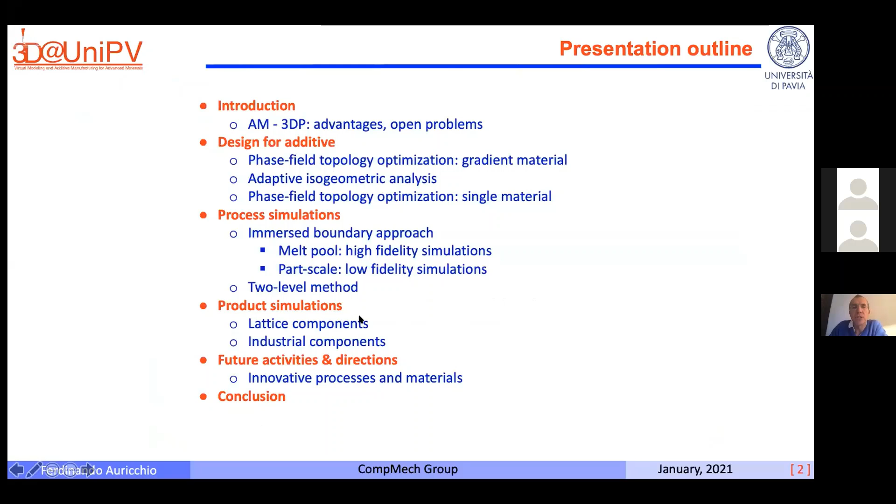Since the school is on additive manufacturing, I don't think I really need to go into it because you are experts by now, and I will really focus on different areas of simulations and possible activities you can do with simulations.

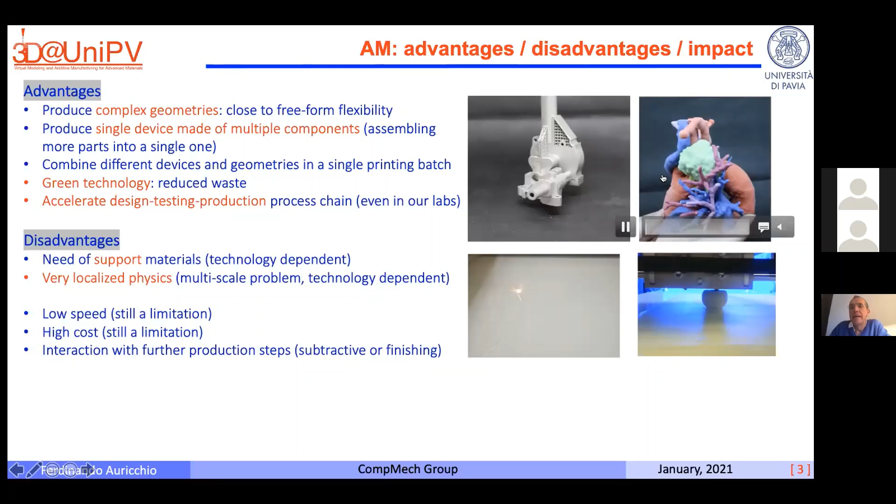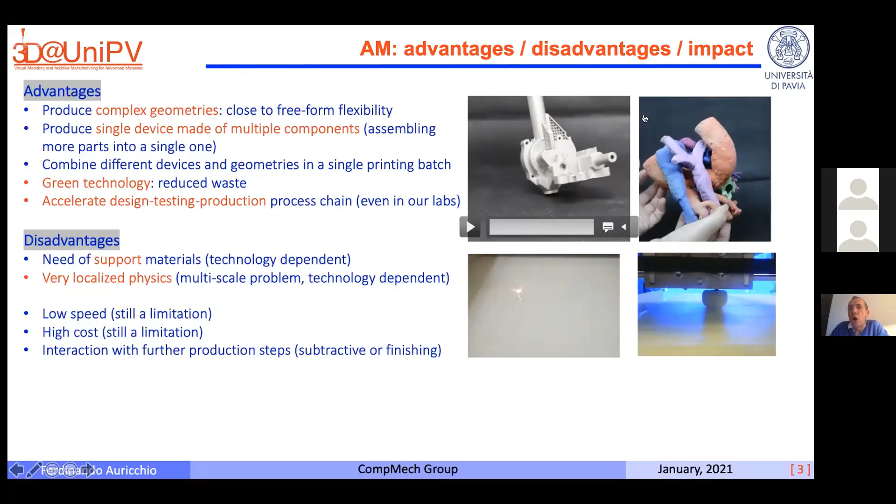So, the point I want to make is basically twofold. On one end, additive manufacturing is a wonderful technology because you can easily produce complex geometries, and in many cases you can also put multiple components in a single device. So it's very easy when you deal with additive manufacturing that you end up with objects which have a really complex geometry.

On the other hand, that's the good news. The bad news is that when you talk about additive manufacturing, you're always talking about production processes which are very localized, with a very high gradient. And in this respect, computer simulations are extremely important.

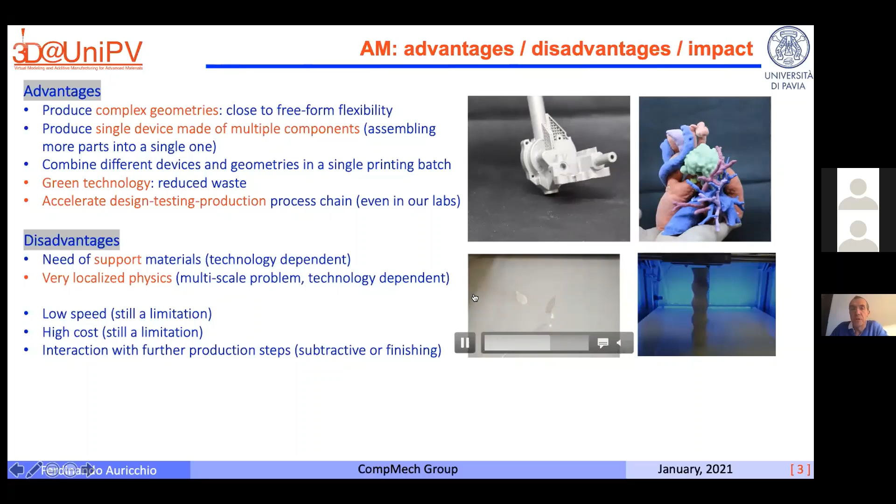So the idea is to address different opportunities, and I will start talking about design for additive. Design for additive presents several challenges, and one of the reasons is that basically additive manufacturing is really opening your brain, and you can dream any sort of geometrical complexity.

So you're very close to freeform components, and this means that if you really want to take advantage of this freeform possibility, you really need to optimize your geometry. And this brings our attention to topology and shape optimization as extremely important tools for the design of these components.

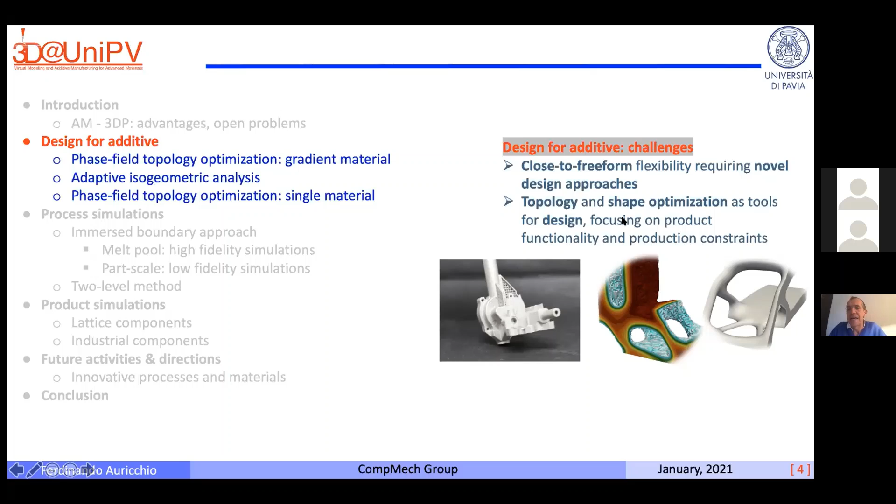Topology optimization is something you already saw in the course. The idea of topology optimization is basically that you have a domain in which you want to distribute a certain amount of material, and you want to optimize the distribution of this material in order, for example, to minimize the structural compliance. So you have your domain omega, some boundary conditions, some loading conditions, and you want to distribute some material and minimize some functional.

Our approach is to try to minimize, for example, the compliance using the phase field method. This is a method which does not require any filter like other methods, and it's very nice because you can get some mathematical proofs regarding the convergence of the method, and these features also transfer into some numerical aspects.

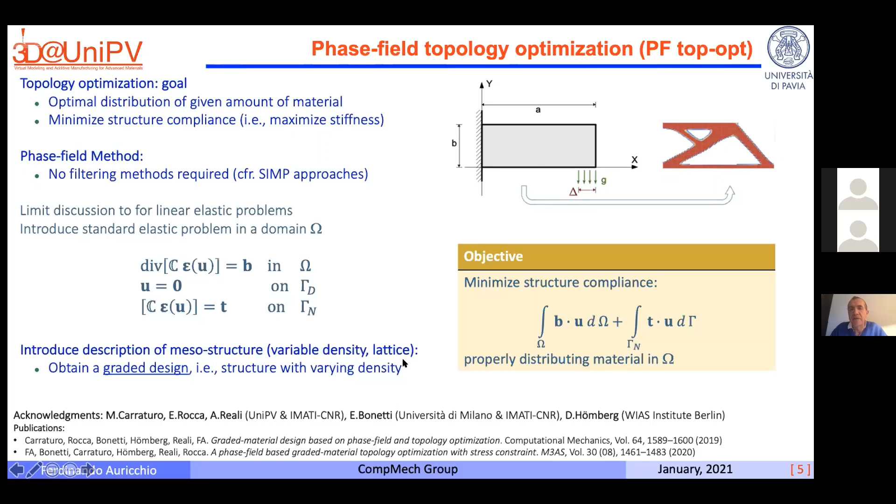The first phase field variable is phi, and basically this phase field describes material presence. Then we have another phase field variable, chi, which describes material feature.

So with this second variable, we want to give the opportunity for our structure not to show only one material, but to have inside our domain the possibility of going from material B to material A. This is really related to the fact that with additive manufacturing, you can easily produce microstructures or lattice structures. So the idea is that you don't only want to understand where you don't need to put the material—that's the phi variable—but you also want to describe which material you want to place and where.

Okay, so using a phase field approach, we introduce a functional where you have your standard compliance, which are basically the two integrals reported here, and then we also have a very classical measure of the perimeter, which is associated with your first variable. However, since we have a second variable, we also want to penalize the gradient of the second scalar field. So basically, we don't want to have the possibility of a structure where you jump from material A to material B too many times.

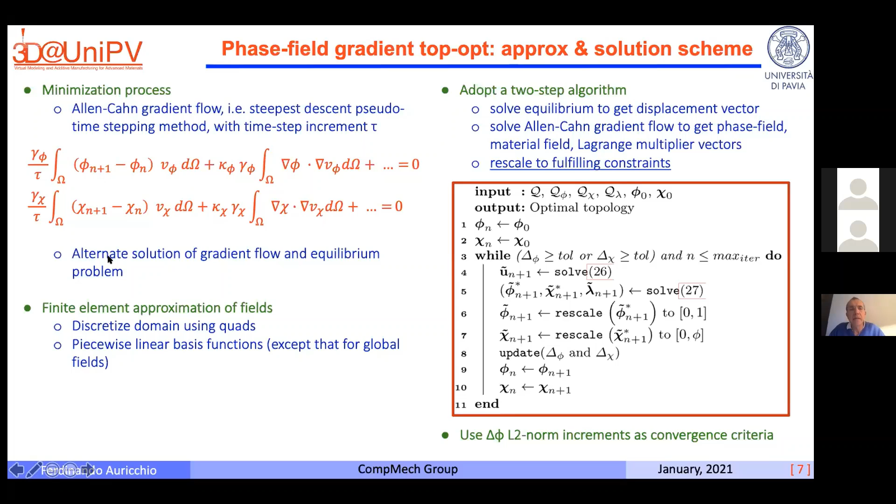Clearly, you can then discretize using finite elements, and the very nice thing is basically the examples you can produce. For example, this is a very standard problem: a cantilever beam, which is clamped on this side. You have some distributed load here, no body load. And if you make your numerical tool run, at the end of the story, you can get this type of solution.

So the structure that we obtain through these topology optimization schemes is already a structure with a gradient, which you can easily produce with additive manufacturing.

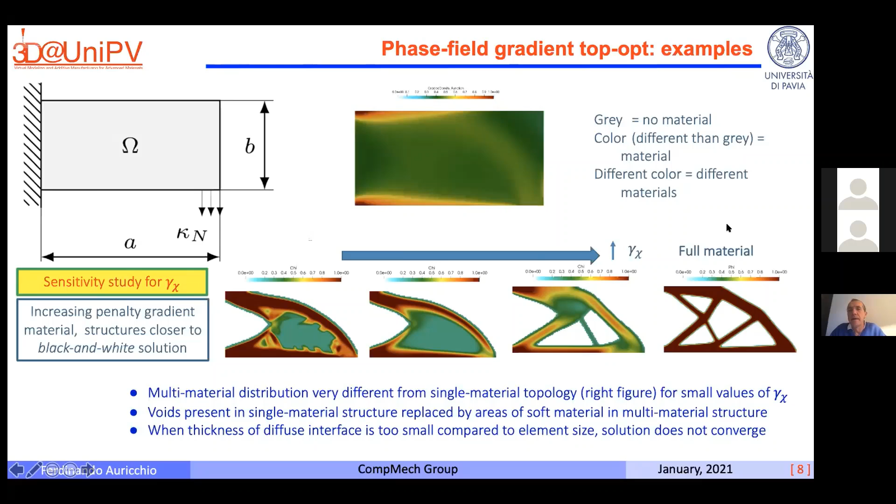You can clearly do parametric studies, and here I'm reporting some numerical results. The basic concept is that by changing the constraint on this second field, you can obtain a structure which shows different compliance, but at the same time also different weights. And you can go from a single material structure to a structure which really exposes this gradient material inside it. So you really have another extra degree of freedom in your design, which we believe is quite useful.

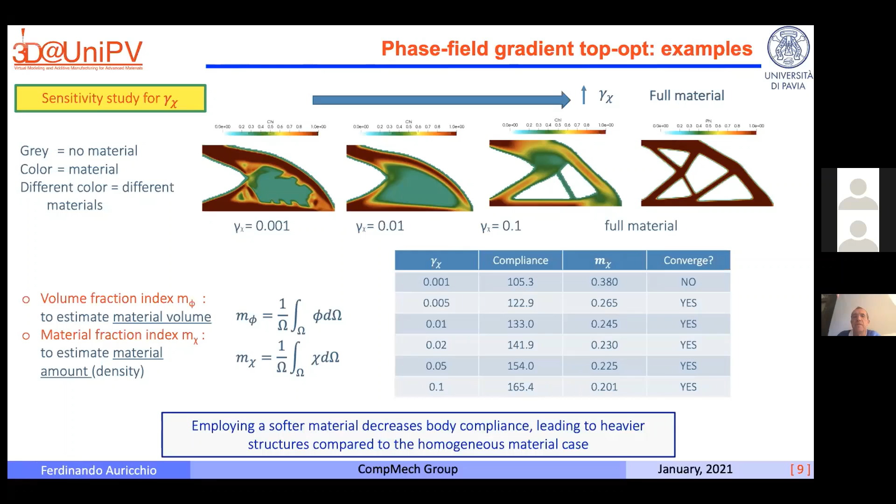Okay, you can do exactly the same thing, for example, for other types of problems. So I was showing the first result for a cantilever beam. Here you can see a very standard comparison test, which is this type of simply supported beam with a concentrated load in the middle. And if you run your optimization, you can see with the black color the region where you have material or you don't have material, and with the graded color here, the region with different types of materials.

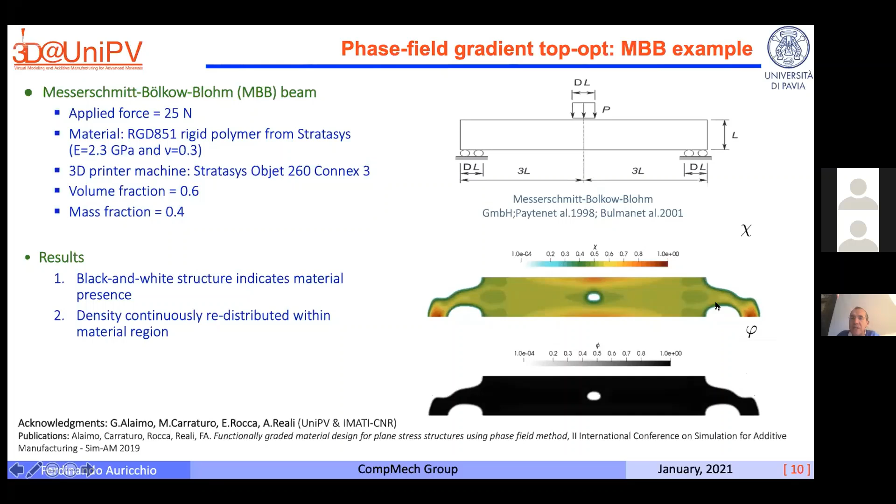The very nice thing with additive manufacturing is that you can also produce your component and you can do experimental tests. So once we run our numerics, we also developed some computational steps in order to end up with a component, which you can see here, where you can a little bit see the internal structure. You can see that in certain regions you don't have material, but in other regions we have a graded structure. And the very nice thing is that we did experiments, and here on the right you can see the structure which is uniform as a material.

So we distributed a certain amount of material uniformly, and on the left we see the same geometry, but where we distributed the same amount of material in a graded way. Here are the mechanical responses.

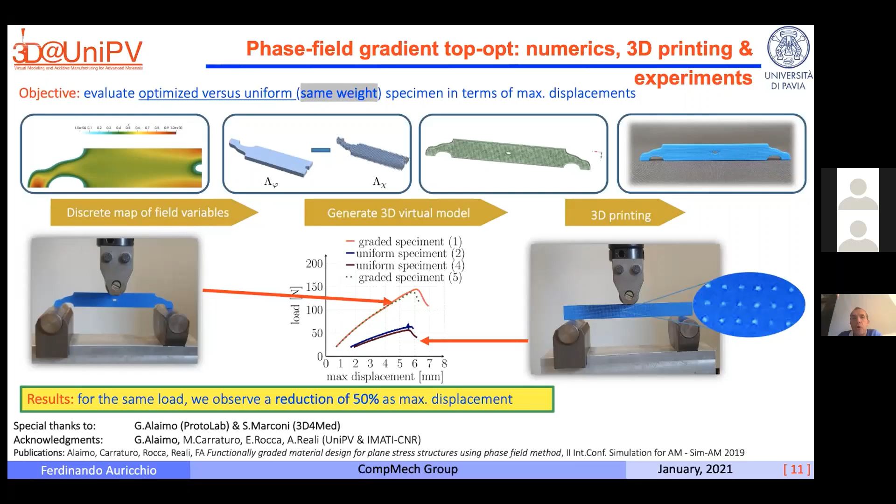And clearly you can see that for the same amount of material, for the same amount of load, the structure which has been properly designed behaves much better, is much stiffer than the other structure. So distributing your material in a smart way inside your domain can really have an effect on the performance of your component or device.

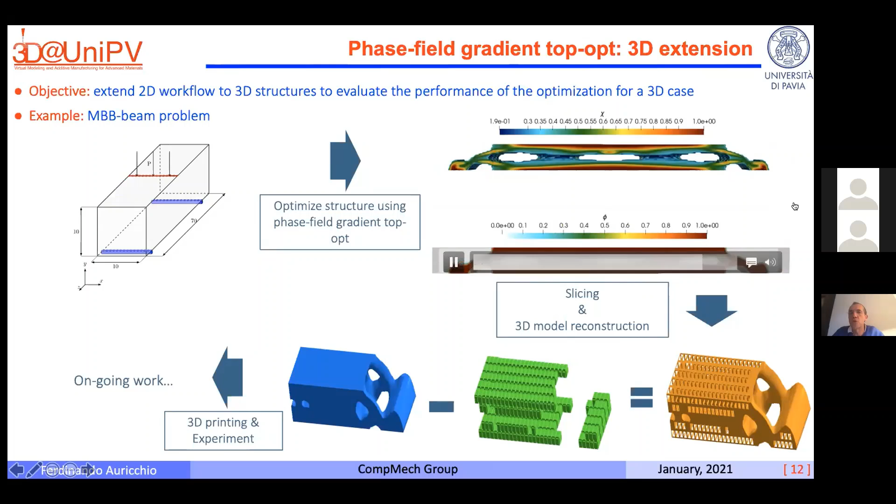The first two examples I showed you are two-dimensional, but clearly you can run the same algorithm in 3D, and here you can see some initial results in 3D. We are getting new results also in these days, so basically the tools work properly in 3D as well.

One of the problems you encounter when studying topology optimization, with the freedom you have with additive manufacturing, is that you don't know exactly where the region is where you need to put the material. So the idea is, if this is the domain where you want to distribute your material, to start with a very uniform numerical grid, but also to develop adaptivity schemes to obtain refinement and capture the local structures.

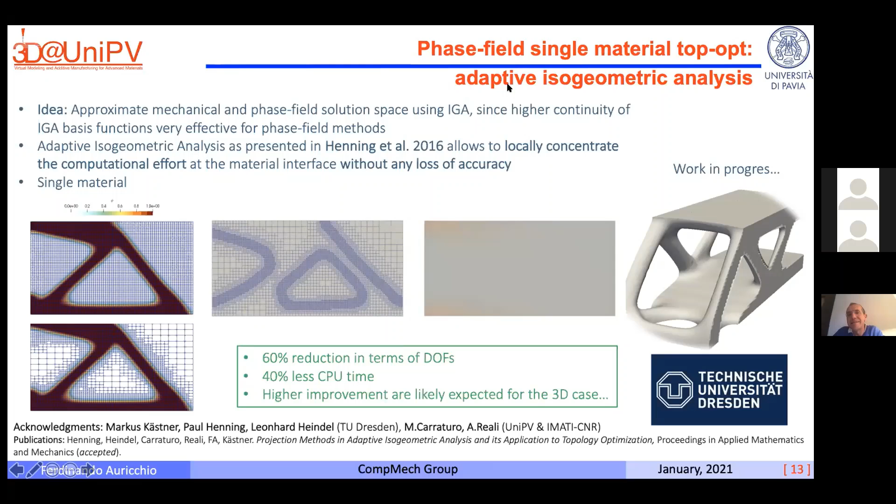Since you don't know where you're going to have material and where not, the idea is that either you have a very fine mesh from the beginning, or you start with a crude mesh but then need local adaptivity. Here you can see some very interesting results where we combine adaptivity and isogeometric approximation schemes.

On topology optimization, we are also looking at other aspects, and here we are proposing several advancements. One thing is that, referring to the previous formulation, now we look at single material instead of graded material structures, taking a step back, and we consider the very standard volume constraint formulation.

The nice thing is that we try to include in our functional not only the compliance, which you saw before, but also a bunch of different terms able to enforce equilibrium directly from a functional point of view. In the previous approach, I was minimizing compliance while controlling the field variables, and then imposing equilibrium separately, but not really enforcing the two together. Now, with this functional, we enforce everything together.

So we enforce minimization of the compliance, but also other constraints, in particular equilibrium, adopting something like an Uzawa approach, and then we also add the volume constraint. The beauty of this approach is that since everything is one functional, we can forget the multiple-step algorithm I showed before, where in one step we enforced equilibrium and in another we updated the phase field variables. With this functional, you can easily explore monolithic solution schemes, which possibly behave better. This formulation is very interesting because you don't only enforce volume constraint, but enforce minimization of compliance and equilibrium in just one box.

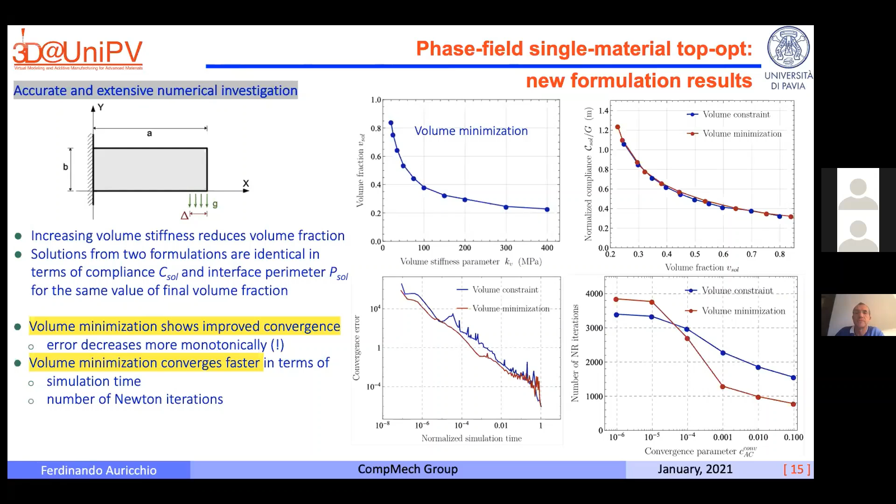This closes the first message, designed for additive manufacturing, which is basically about finding the best way to distribute your material in the domain.

Now I will move to the second area, which is slightly different: process simulation. Additive manufacturing, as I mentioned at the beginning, not only gives you a lot of freedom, so you need topology optimization, but it also gives you a lot of problems, because it's a very localized, non-linear phenomenon that you use to build your component.

So producing objects with additive manufacturing is sometimes not as easy from a technological point of view as with standard technologies. So you really need to do computer simulation and support your construction process with simulation.

What are the challenges when you want to do process simulations? There are many different challenges.

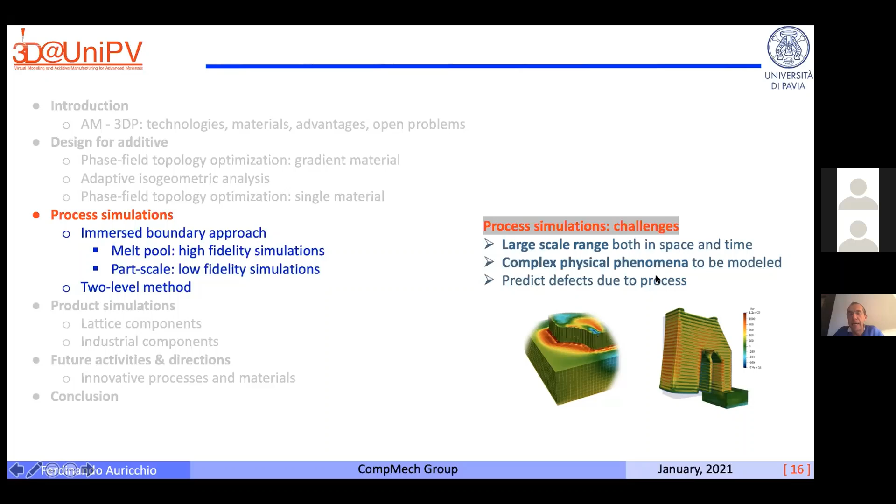One is the large scale range, because the process is local, it's in a very, very small range, but you want to construct components which are very large. So you want to describe very different scales at the same time. And on the other hand, you want to describe very complex physical phenomena. So it's really computationally challenging.

The classical approach is to use a very iterative loop, which is the standard design process. So basically, classically, you draw your component, you mesh it, and then you do the simulation. And if something isn't really working, you go back. This process is really iterative and really time consuming.

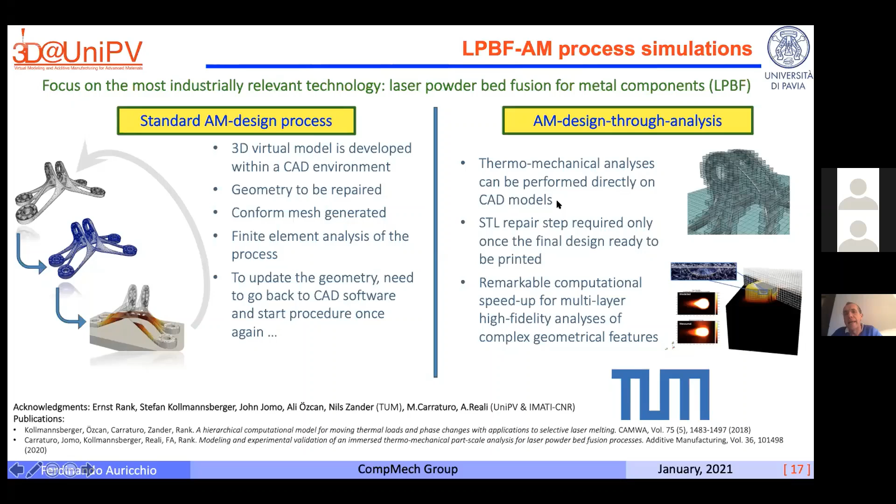Our idea is to be much faster, so not making this iterative process so rich in terms of steps. The basic idea is to try to use directly your CAD model to perform analysis. So we don't want to actually mesh the geometry, but we want to use the CAD model directly to do the analysis. The way we do this is using immersed methods.

In the following, I'm going to talk about two different immersed technologies. Conceptually, the immersed technology is very simple. If you want to study a component with this geometry, you simply immerse your physical domain in a much larger domain, and you mesh that much larger domain.

So your mesh is not, as usually said, a fitted mesh. If this is the physical component, your mesh does not follow the boundary of your component, so the mesh is somehow independent of your component. You have a very large domain which you mesh, which becomes your computational domain, and then you take your component and project it onto your computational mesh without paying any special attention.

What is the problem? The problem is that the mesh is not fitting, so you need to take care.

You need to somehow describe where your component is and where it is not. To do so, you use some sort of local refinement. So if you take a region down here or up here, you progressively refine locally your description, and you take into account the geometry not through a conforming mesh, but through a conforming integration rule. So you don't refine the mesh, you refine locally the integration points, putting more and more of them to properly describe your geometry. This is the standard immersed method.

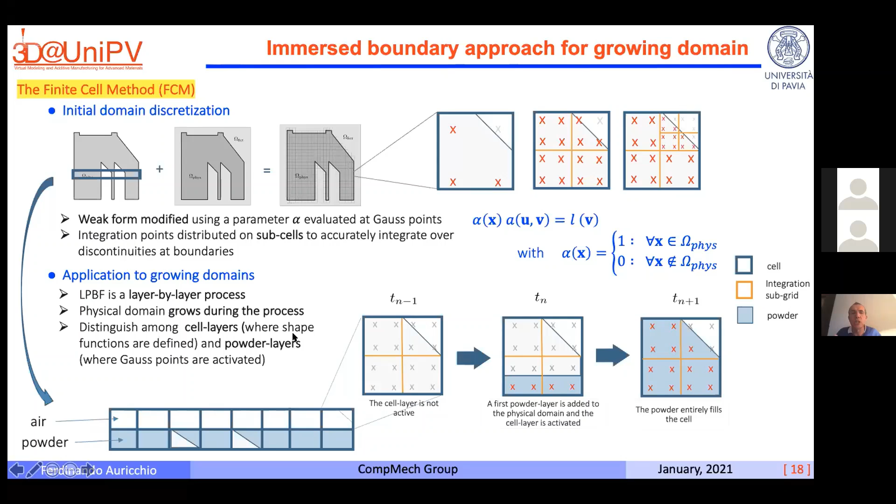In particular, we are going to look at the finite cell method, but besides that, we combine the classical finite cell method with another ingredient. Basically, the dimension of the finite element you introduce may not be small enough to really describe the process of laying down powder, melting it, and then describing the solidification process. So we also introduce Gauss integration refinement to describe the progressive deposition of layers. We need to distinguish between the cell dimension, which is the dimension of the finite element mesh, and the powder layer dimension—between the physical ingredients and the computational ingredients.

This approach is extremely flexible, and using it we were able to describe melt pool analysis, which we also call high fidelity simulations, and part scale analysis, which are clearly much lower fidelity simulations. The idea, in any case, is either to describe locally what's happening or to get a very global response.

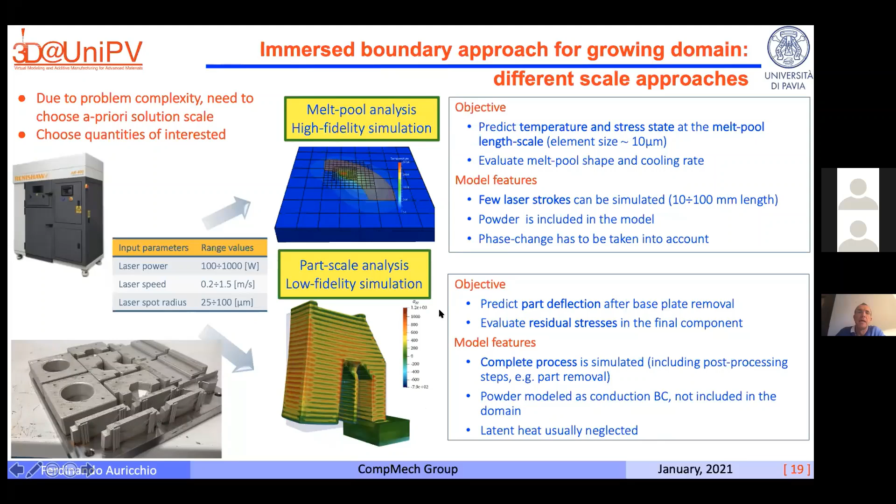So the question is, how can we simulate melt pool investigations or part scale investigations using this finite cell method? Here is the melt pool description.

Clearly we have a thermal part and a mechanical part. In general, we try to use very simple models, because if we put too many ingredients in the model, the computational burden becomes too high and we're not able to run the numerical simulation. So we have a very simple thermal model where we describe phase transition in a very approximated way, and then we couple the numerical thermal results with our mechanical system. Here you can see the simulation of a thermal problem where a laser moves back and forth on your component.

Here you can see, on a different geometry, the mechanical counterpart, and here you can see in reality multiple laser paths and multiple powder layer depositions. So the idea is to really get to very simple models.

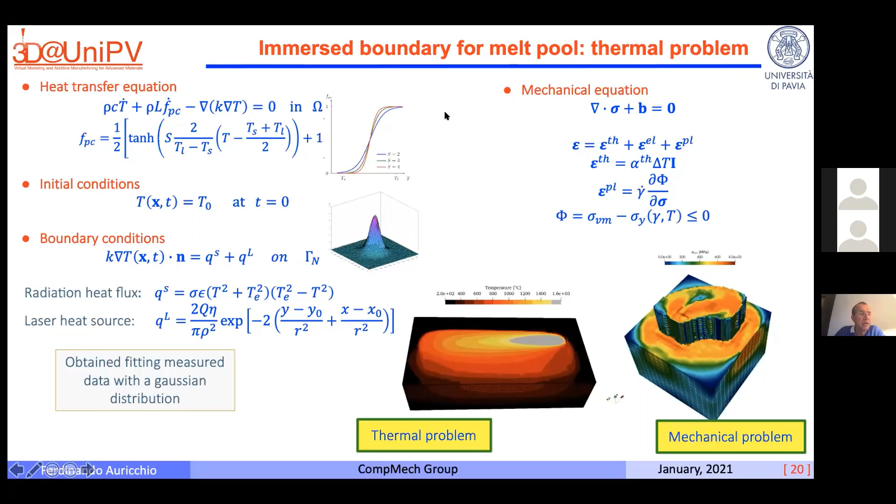But clearly we want our model to be feasible and accurate. Here I'm showing you some very interesting results performed against experimental results produced during the additive manufacturing benchmark in 2018. For example, you can see here some ex situ measurements of the melt pool cross section—there were some runs of the laser, then the component was cut, and you can see the numerical result with the red curve along with the experimental data. There are some differences, but there is a very good match between the prediction and the experiments.

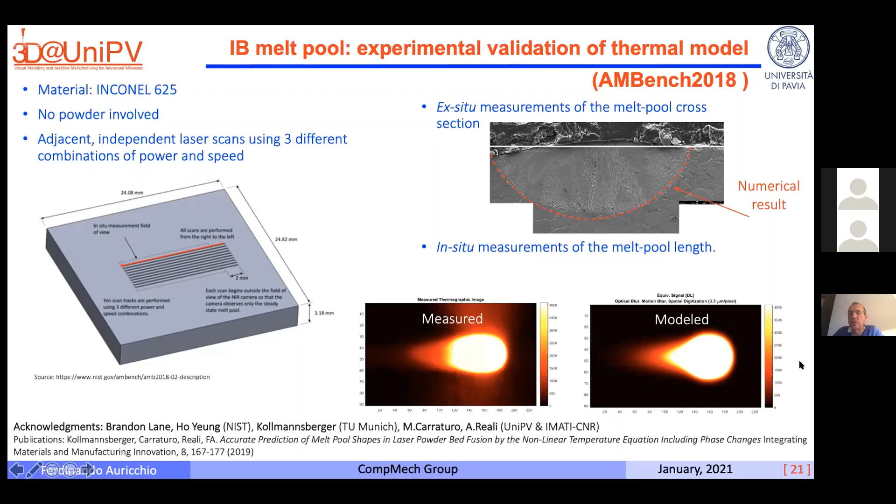You can also see some in situ measurements of the melt pool length. Here you can see on the left the measured melt pool and on the right the modeled melt pool, and there is a good match between prediction and experiments. Using this technology, you can do always more and more complex things, and here you can see some results relative to current investigations on different scan strategies.

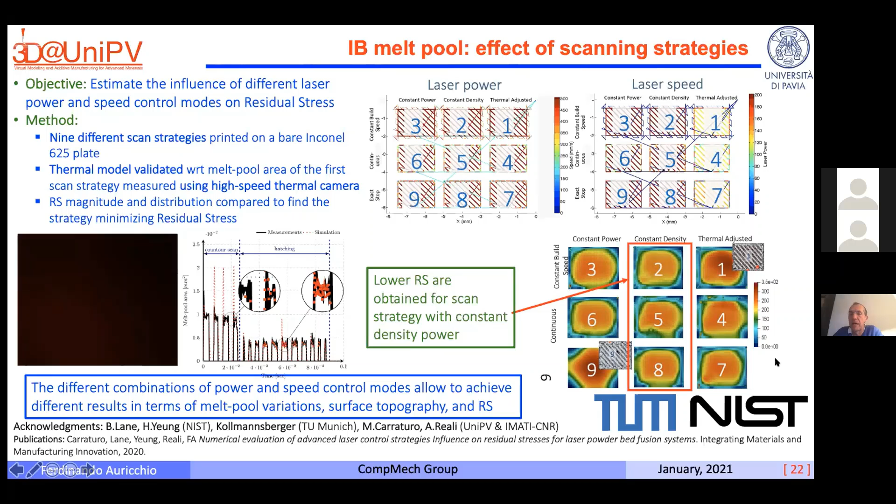So basically, once you have a numerical tool that's able to accurately predict what's happening in the material, you can start also to design, for example, your laser scan pattern in terms of power and speed, and try to optimize what's happening in the material. You can see here some different numerical investigations, and we are trying to match with experimental data.

So this is everything at the low scale melt pool, but we were also very much interested in what's happening at the high scale, the component scale. We also have a thermal model and a mechanical model, again very simple, and we combine the models to run together.

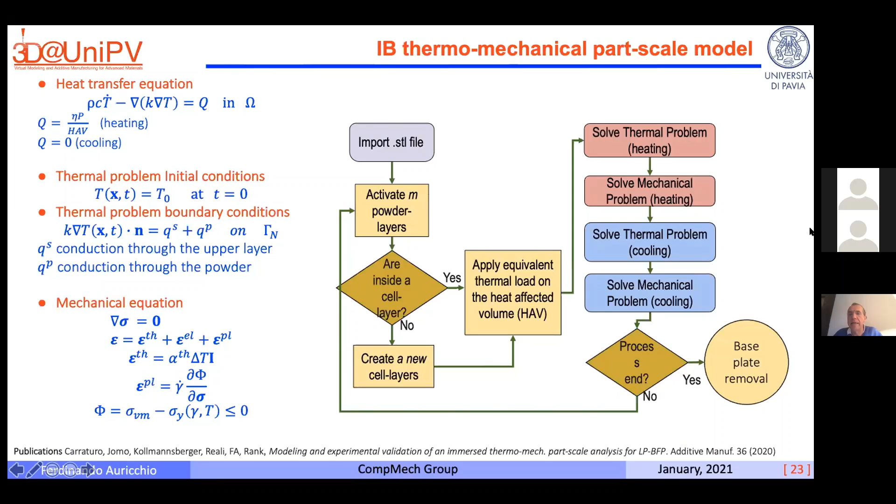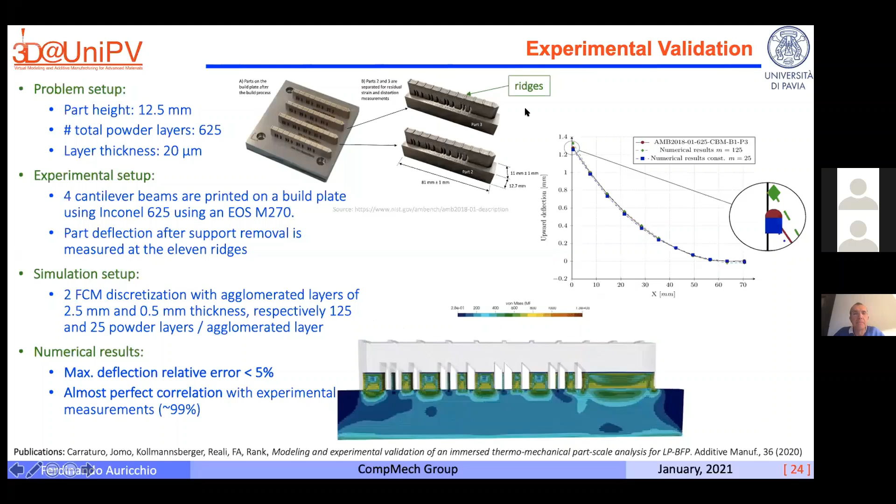Clearly, the finite cell method is not the only immersed method you can think of; there are also many other methods. Here, for example, there is another two-level method where we take a different approach. We don't refine using Gauss points, but we refine locally the description through a local, small finite element mesh.

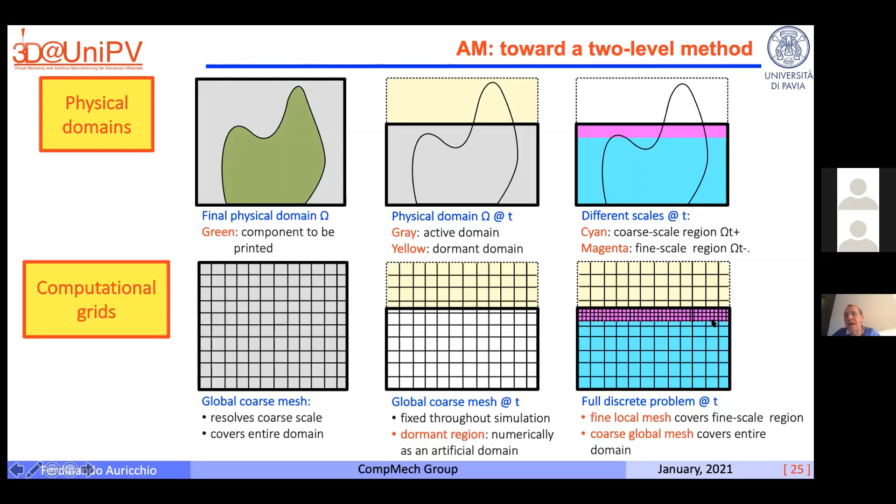So basically, we have a global background mesh which is fixed. We have a region which represents the component that is building up. So there's a physical region and the region which is going to be built, and then in the sub-region where the physics is really happening, we put an extra local, very fine mesh. So here I'm showing you just some simple ingredients.

For example, for a very simple toy problem, let's say just a thermal problem: if you have a thermal problem in a certain domain with an inclusion, basically you split your thermal problem into a global problem which does not see the inclusion, and a local problem which does see the inclusion.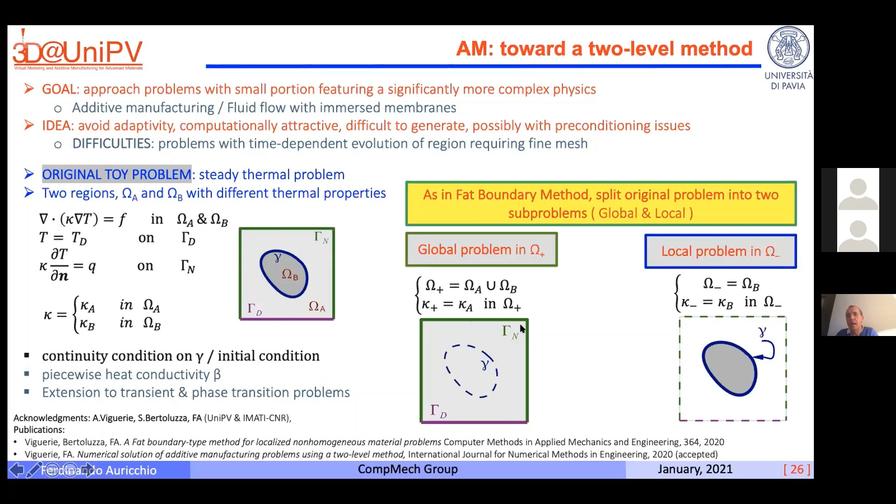So instead of solving the problem in domain A and domain B, taking into account the different thermal properties of the two regions, you solve the problem in a global domain and then in a local domain. You can develop numerical tools where you solve the problem locally first, then globally, and then iterate between global and local, and you get convergence to the right solution.

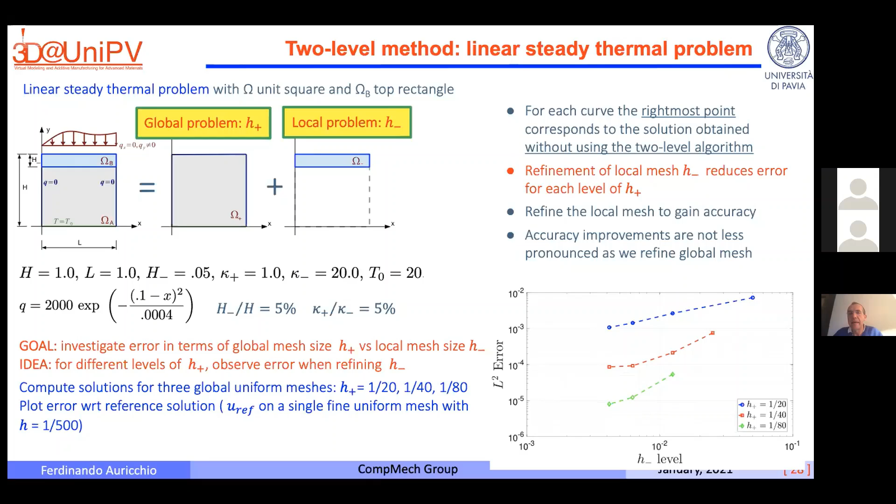The very nice thing from the numerical point of view is reported in this picture. What is it showing? It shows that if you fix your global mesh and refine only locally, you get always a better behavior. So basically, if you have phenomena which are very local and you want to describe them better and better, you don't need to refine the mesh everywhere, only in the local region, and that's what these numerical results show.

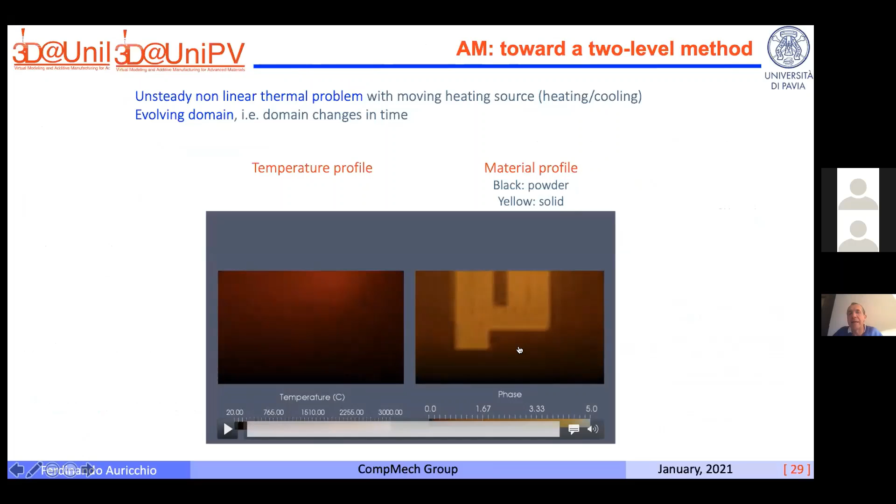Clearly you can try to do everything not only on a fixed domain, but also on a domain that's evolving. On the left, you can see some preliminary results showing the temperature profile, which increases progressively because the laser is turned on and off. On the right, you can see that the component is progressively building up.

So this closes the second part of my presentation, which is on process simulation. Basically, the ability to really take into account either very local phenomena at the melt pool scale level, or to really support the design of the complete part, describing also the production, for example, of residual stresses. And I was showing these in this second part using immersed technology.

As the third part of my presentation, I would like to discuss with you a third area where simulation can be extremely important in additive manufacturing, and it is product simulation. What are the challenges for product simulation? There are many different challenges, and basically the main ones are quality control of the final parts, material characterization, and trying to really understand the mechanical properties of the printed part.

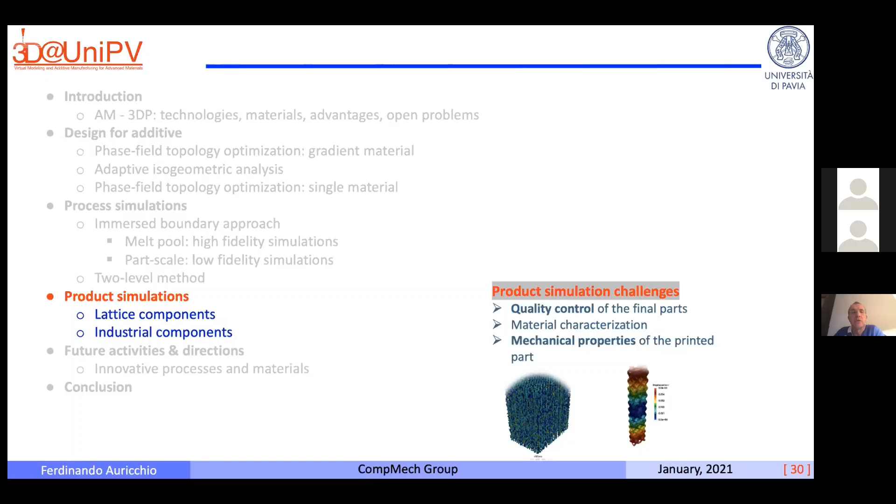So this third area of contribution is really an area where you produce a component and then something goes wrong and you don't understand why. So the question is how you can support your design through computational methods.

Here I'm showing two different areas of activity. One is relative to lattice structures. Everyone using additive manufacturing is trying to produce lattice structures, because they can make your component very light, but they are also really problematic from many other points of view. The dimension of the lattice is usually very close to the precision of the technology you use to produce your component, and this can be extremely challenging from a computational point of view.

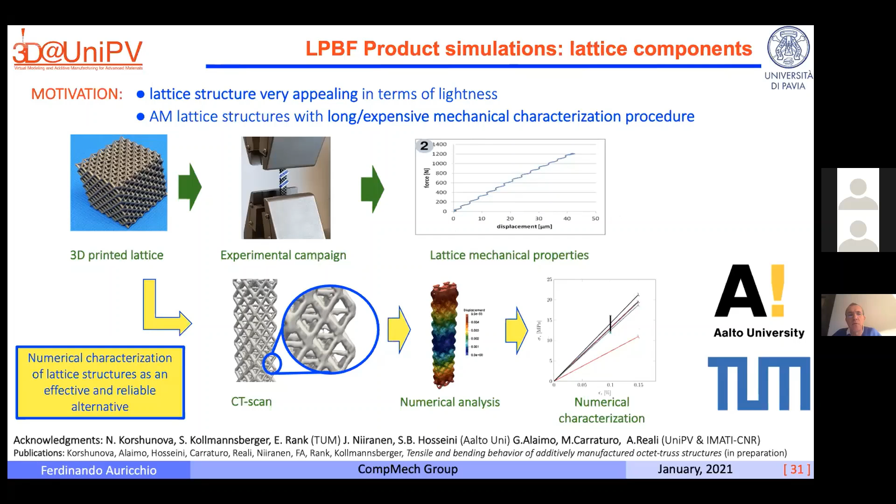So what was the experience we had? Basically, we 3D printed some lattice structures. We did an experimental campaign, so we got some force-displacement curves, and then taking the geometry of the lattice, we ran some simulations. From the physical experiments and numerical experiments, we were getting very different results. The mechanical behavior was far from the predicted behavior.

One of the reasons is that if you do a CT scan of your component, since your lattice structures are very small and you try to make them as small as possible, getting very close to the production precision, your lattice structure ends up extremely irregular. Here you can see CT images of our lattice structures, and you can see easily that it's completely far away from the idealized CAD component that we designed. So we have a very different structure, and the question is, how can we do computation with these structures, because the geometry is extremely complex?

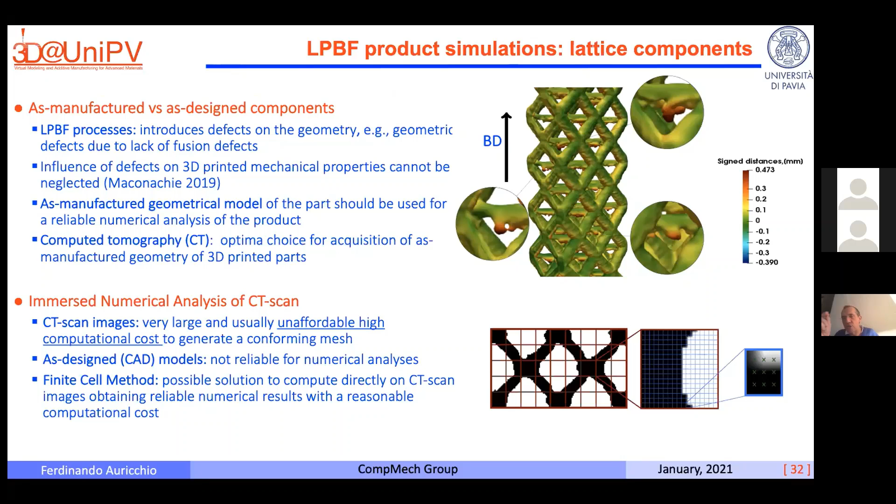So the idea here is, again, to go toward immersed technology. If you immerse your CT scan images inside a much larger domain, describe your geometry with refinement on Gauss points, and then run the simulations, you can get a much better response. You can see here the comparison.

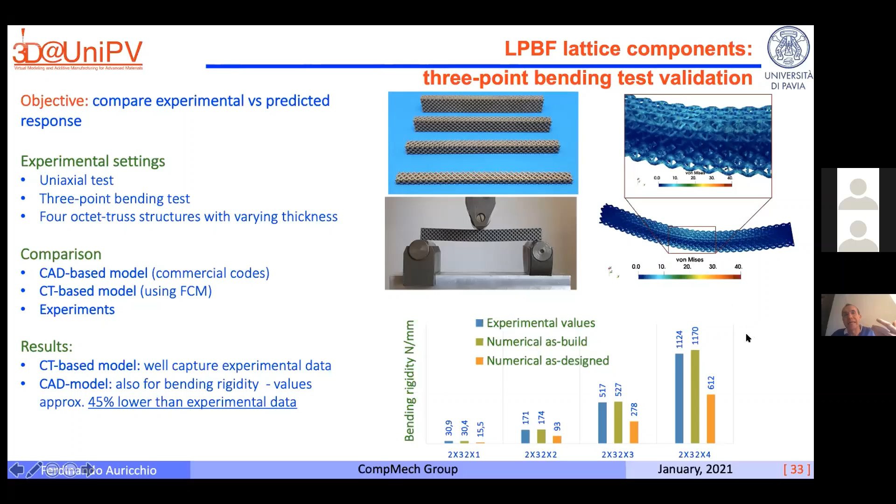Let's look at these results. Here is the column with the experimental value, and here the numerics obtained adopting, as a base for the numerical simulation, the idealized geometry. As I mentioned, these results are much different from the experimental results — the two structures are completely different. But if you use the really produced geometry, the CT scan based geometry, you get a very good match between numerics and experiment. So lattice structures can be really problematic, but advanced computational tools can be really effective.

In terms of industrial support, another area that's opening a lot of different activities is supporting companies in the production of components. Here I'm showing experiments that we are doing with different companies, in particular with the coffee machine producer named La Marzocco.

Here you can see a component of the coffee machine — basically the part where you put the coffee powder. And here you can see instead a decorative component; it looks like the Florence lily.

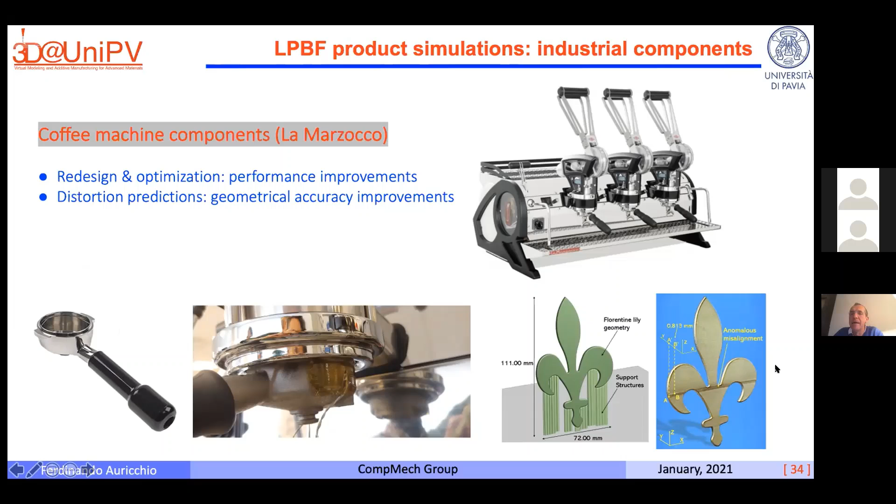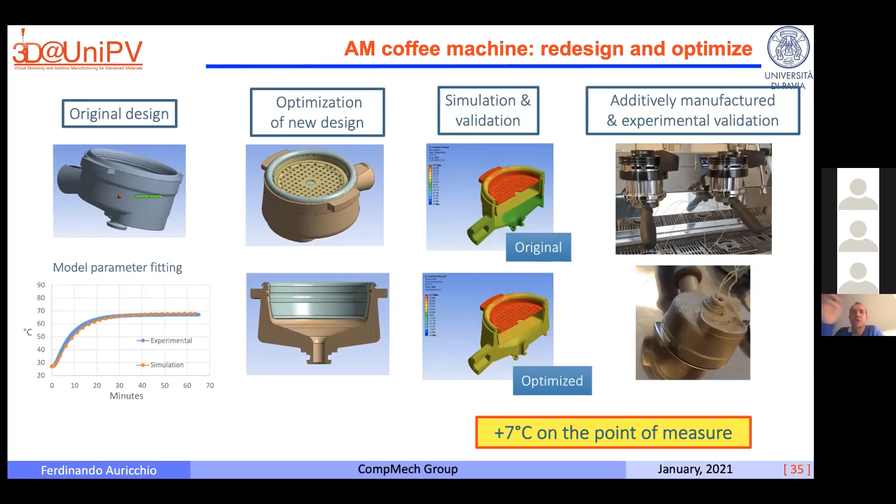These two components pose some very interesting questions. For the filter support, the idea was to optimize the geometry, because they wanted a geometry able to increase the temperature of the coffee powder. With additive manufacturing, it was possible to quickly do the numerical simulation, production of the components, and the experiments. We tested our new design on the coffee machine and were able to increase the temperature. So to do the optimization and production, you need a lot of simulations. This is a very interesting area.

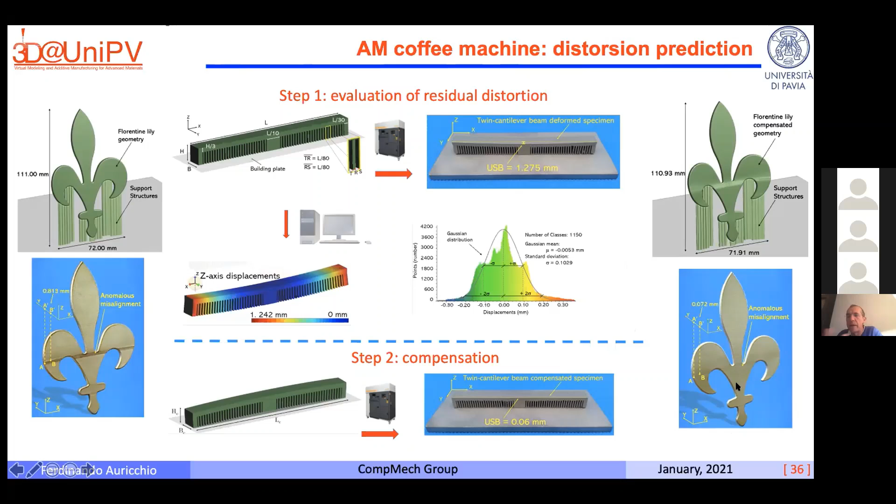Another area where computer simulations are very useful is that sometimes when you produce your component, you get defects related to things we already saw. Here you can see the idealized Lily geometry, but once we produced it, we got a very funny response - there was a clear anomalous misalignment in the production process. We performed the numerical simulation, corrected the geometry thanks to the predicted residual stresses, changed the shape of the printing design, and reprinted the component. As you can see on the right, the new component is much better than the previous one - no defect.

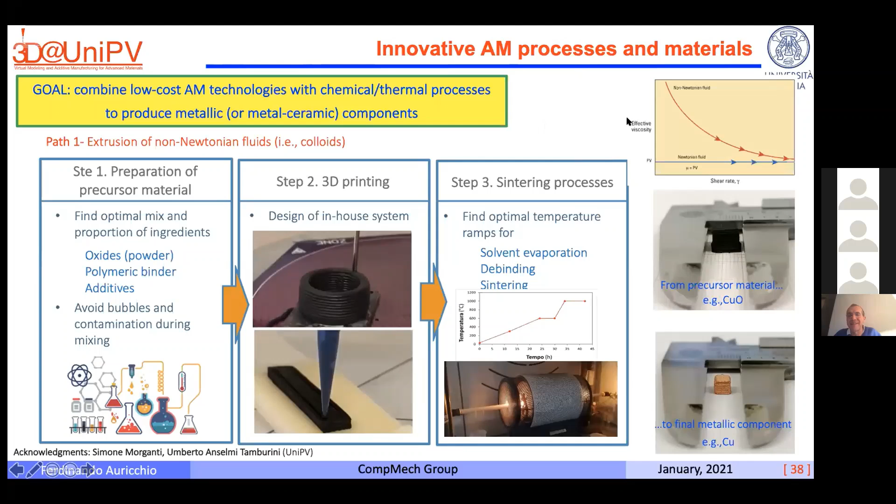Additive manufacturing is a very challenging area for many computational aspects, but also extremely interesting because it's opening many new ideas and areas of activity. Here I'm showing you two areas where we are very active at Pavia: designing new 3D printing technology. For example, some gel-based deposition technology, a sort of FDM, but these components need to go through a sintering process. Again, computer simulation can really support this technology because it's very complex - you need to computationally describe the entire sintering process.

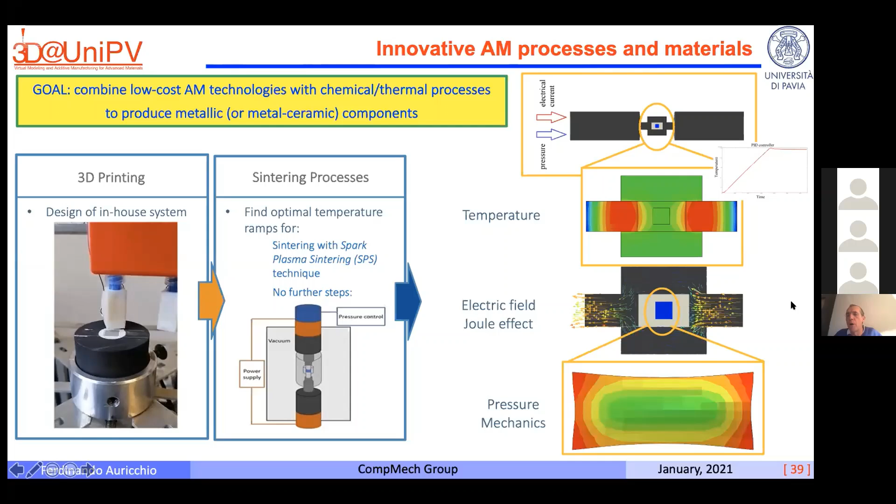Here's another technology we're working on, where we deposit powder and also have a sintering process. Simulations can be extremely useful and important to optimize your component. But again, 3D printing is really opening many areas of activity.

Here are some other areas of activity we're working very hard on in Pavia. For example, we have a very interesting lab in the hospital where we support surgery, and there are many computational challenges because we want to obtain reproductions of organs as close as possible to the real organs. So there are many mechanical questions and computational issues.

Another area of activity is bioprinting - printing gels with cells. There are many different physics that need to be described to understand how cells behave. There are also many activities on 3D printing of concrete, which is extremely interesting and challenging, and also 3D printing of active components, possibly with multiple steps.

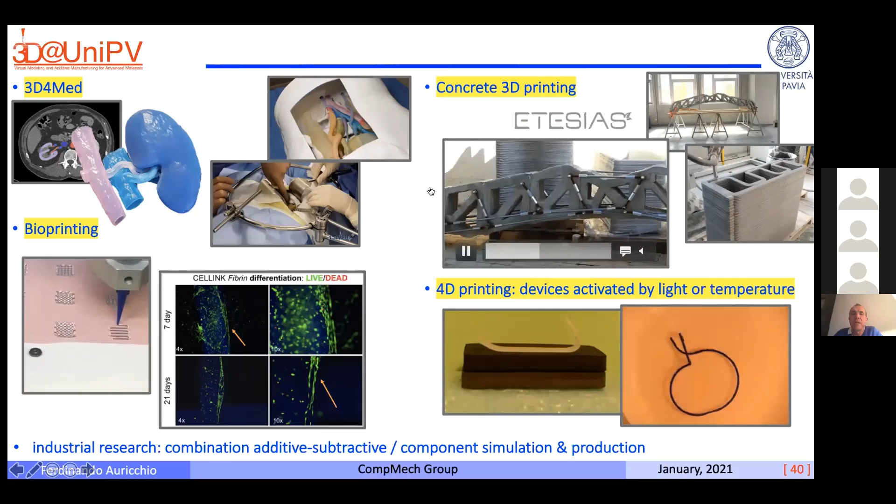Really smart components, and this brings us to the closure of my presentation, my quick excursus. To come to a conclusion, the only thing I can say is that everything I showed you clearly comes from the work of many people.

Let me thank in particular Massimo Carraturo, Stefania Marconi, Gianluca Alaimo, Alessandro Reali, Michele Conti, and Simone Morganti, who are in Pavia. As I was showing in the presentation, I didn't mention the names, but we also have many international collaborations. I need to recognize the work of these six co-workers in Pavia, but clearly there is a whole team that has always worked in this area. I hope I've shown you that 3D printing is really challenging but a breakthrough technology, and I hope many of you want to challenge yourselves in computational mechanics within additive manufacturing. Thank you very much.

Thank you. Thank you very much. Very nice presentation. If there are any questions.

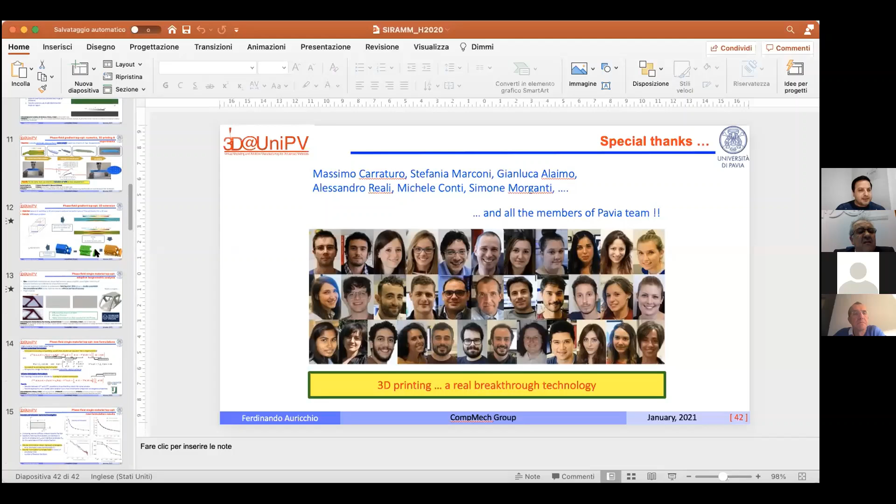Sorry, my name is Angel Cernescu. Nice to meet you. I'm still thinking about the test you showed us at the beginning of the presentation, where there was a bending test on an optimized component. So how did this fail during the test?

Okay, we didn't really explore the failing. The goal of this test, I went through it quickly. I showed you many things, but this is a very interesting experiment. It's somehow standard now in 3D printing.

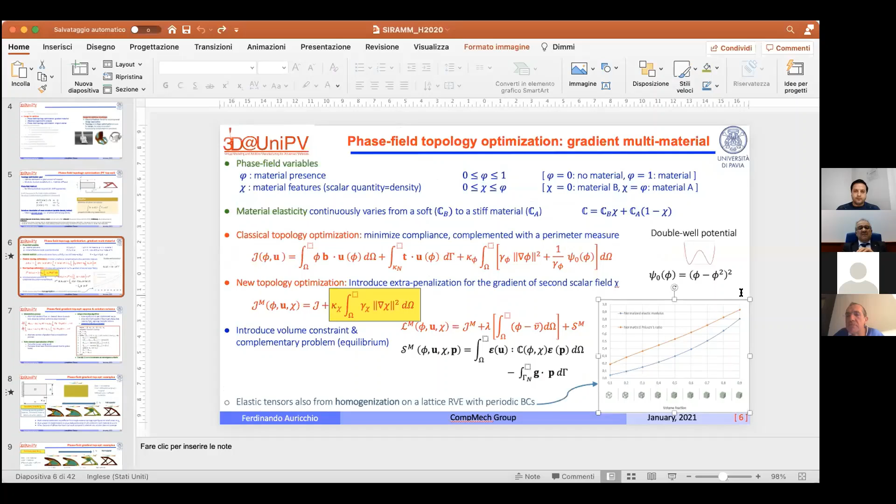But how can the material be more dense in some regions? Well, with voids. In the same volume you can do it with, let's say, lattice, for example. Let me show you. Maybe here, it's not fully filled. Exactly. So for example, here you see, I can have the same structure which is either much more voids than material, or much more material than voids.

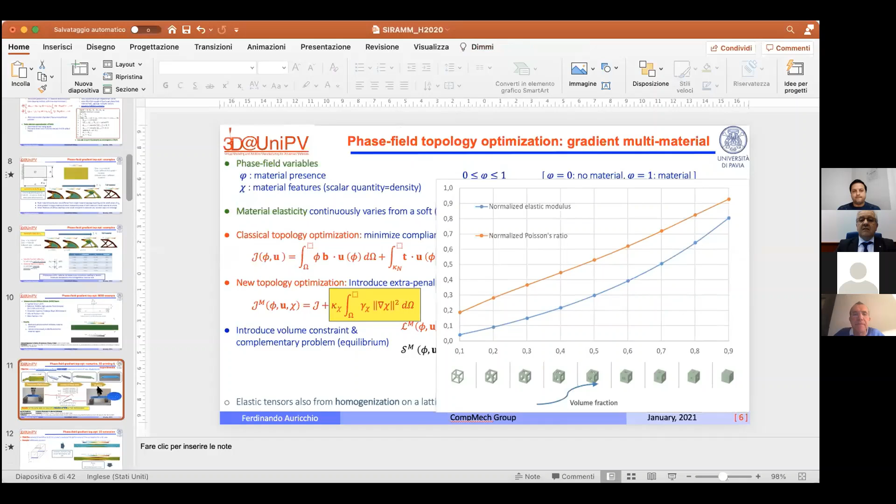So even if I fix my lattice geometry, I can put more or less material per unit volume. And so in the structure on the left here, I distribute the density non-uniformly, and on the structure on the right, I distribute the density uniformly. And I obtain on the left a much stiffer structure.

And clearly this is a very simple problem because we talk only about density. You can clearly work with computational tools where you also have, for example, orthotropy. So it's not only having density, but you can also decide to change the orthotropy of the lattice. For example, I can make my square lattice longer in one direction or another in order to go toward orthotropy or anisotropy. So additive manufacturing is really giving you so much freedom to do design that you can use it if you want to.